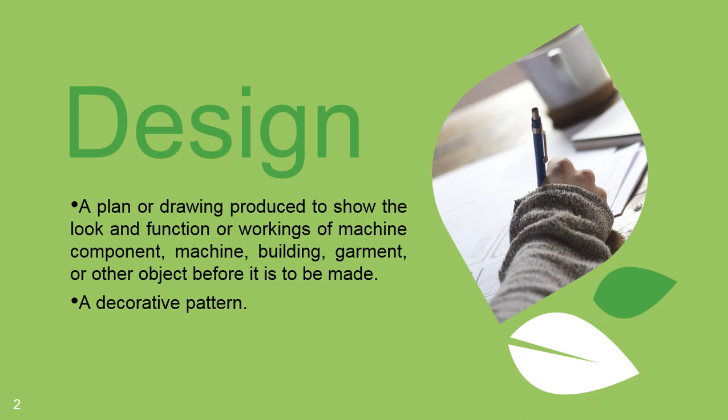So what does design provide? What things can we get from design? Number one, functionality. What does the system do? What is the process, and what else? As well as we get a message, like this diameter is that, or something.

It provides design like the traffic symbols. It's nothing but small designs which have been made. It gives a message that school is ahead, so you have to slow down your vehicle.

Professionalism, like when you are preparing a PPT or submitting your thesis, you will maintain some decorum. That's also a part of design.

Next, branding, like what we do in branding a mobile phone or any of the products.

So we use accessibility, like how it could be accessible. Like if you make a pen, can you hold it? How much time can you hold it? So this thing is relative to each other.

Now, engaging. Design is something related to marketing also, which engages you to this component or product. As well as it makes things simpler to understand, like the safety brochure given in aircraft while you board. It is written there how, in case of emergency, you have to slide down or something. That's a representation, so that's also one type of design.

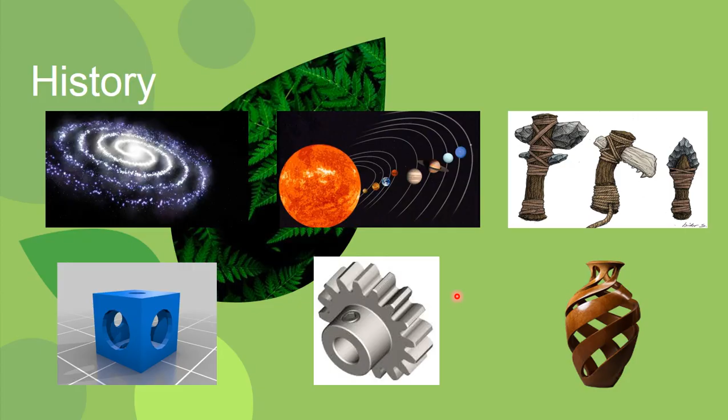Next. Now, Irene Etzkorn has stated that if you design something like a refrigerator, if the design is well enough, it will be very good. If it is not well enough, or not perfect, that means there will be a lot of problems.

Like a refrigerator, if it doesn't work, the things which you have kept to refrigerate or freeze will stink. There will be a bad smell. But if it works, it will not smell. So that's why he stated that good design is like a refrigerator: when it works, no one notices, but when it doesn't, it stinks, meaning there will be a bad smell.

So that's the thing with design also. If it's a wrong design, or if there is a flaw in the design, everyone will notice. Like in the Boeing 737 Max, everyone noticed that there was a problem with the system. So this is what happens.

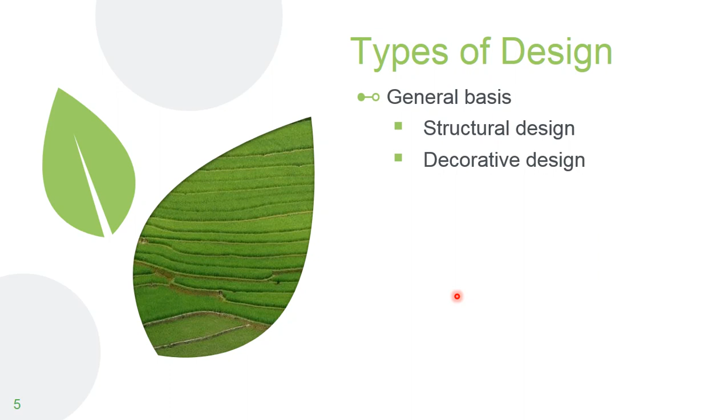Next, what are the types of design? Design has basically been divided into two categories: one is structural design, another one is decorative design.

Now in terms of origin of manufacturing, there are two types: natural and man-made. Natural is like our leaves, the earth, the planets, as well as our hills. So everything, our galaxies, everything is natural. And man-made is like mechanical, what we do when we make cars, aircraft, we make everything. So mechanical is something like that.

Electrical is like electrical networks, where we use electrical transformers. Civil is the making of homes, houses, all construction. So on it goes.

So method of design: there are two types of method we do, one is 2-dimension and one is 3-dimension. After that we do plotting: one is manual plotting, another is electronic plotting. One is done on sheet, another is done in software.

But before that, you need to know that while designing all these things, you have to go through some mathematical calculation. It's not that you started designing something out of nothing. There are a lot of things you have to go through, but it's all easy to understand if you study and explore the things.

It is somehow the same as the earlier ones, but I'll tell you what used to happen in the earlier age. So what happens is that after the 3D model has been created, it is simulated using other software, or it is simulated using pen and pencil. It has been done with both. After that, if it passes the simulation analysis, it goes for prototype testing, like a prototype is made, or something, in simple words.

A replica is made according to the 3D model presented, and if it passes, it goes for manufacturing. If not, it goes back to the 3D model, and they spot out the problems where they have failed. They rectify the 3D model and again go through simulation analysis, using a computer as well as pen and paper. Then it comes to prototyping.

This is similar to the ancient type also. In the earlier days, before simulation software like ANSYS, Abaqus, COMSOL existed, what we used to do is have a conceptual design, then draw the 3D model by hand, entirely with pen and pencil. There was no computer, nothing to do with computers.

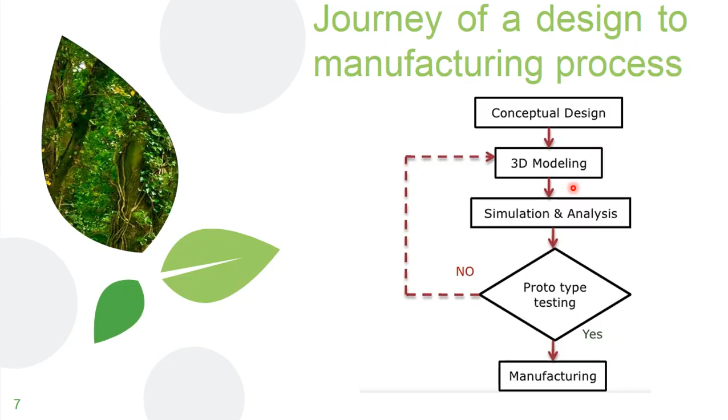Now we have software-based design concepts, which are very easy to interpret. For software-based computer designs, we have to learn one more topic in further classes, called the finite element method. That software-based system can also be linked with CNC, computer numerical control, which is automatic manufacturing. You don't need to make the physical model as was done in earlier days.

It is very easy to create, you could alter it, edit it, and it could also be used for presentation and marketing, like dummy mobile phones in a mobile phone store. That's presentation or marketing done through a 3D model. It's very, very simple.

As I told you, there's a topic about finite element methods. It's very simple, don't overcomplicate it. You don't have to learn it right now; we'll discuss it in upcoming topics.

Finite element method is nothing but analysis of a part or section in smaller divisions. That means if you have a 10mm by 10mm square, you will divide it into 4 halves, 7 halves, or millions of halves. Then you analyze each block and get the answer. This gives distributive knowledge regarding stress and strain, explaining where the actual stress occurs and how it transfers from one point of the body to another. So it gives a brief idea about the design and diagrams, everything.

This comes with a new example for today. This is where the design situation starts, termed as design synthesis. What is design synthesis? It is nothing but a manufacturing process, but from design to manufacture, there is something to be kept constant and something not to be considered constant. This is where synthesis comes in, meaning where you can change or alter things.

Let us take an example of a Coke can, Coca-Cola cans. The diameter of the can is similar for every can you buy; if you buy thousands of cans, you will find the similar diameter. That similar diameter has to be maintained to resist the pressure, so that it will not deform due to high pressure. In other words, the minimum diameter required to be maintained for every can, such that the pressure generated inside a cold drink can should not cause it to explode or deform. The body should not be deformed. So this is what is happening.

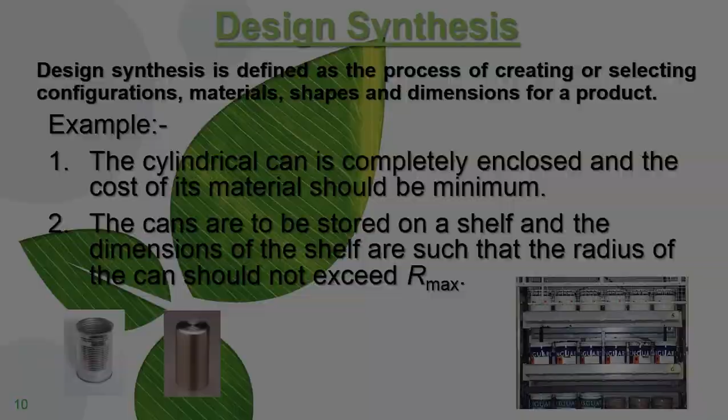That means there will be very less tolerance allowed. Like diameter is 15mm, so that will be 15, but there may be tolerance like 14.95, 14.92, or 14.2, 14.8. So they have a very less tolerance. For that you need precision in testing elements. Okay, that is where the design process is, synthesis is done.

Now let us go for a small review of how it works for the design process. For a simple example, let us consider a mobile phone. We'll understand with this example that will give a more broader view.

So what happens is that a mobile phone company will be surveying the market. After surveying, they will define their specification - they study what specification is required and what is not. After that they will search for this product - do we have that product, or do we have to have this type of product or not. If it is there, we'll be updating it. If it is not there, we'll be creating it.

That's done. After that, if it is being updated, everything will be laid out - what components are required and what are not. This will be generated and calculated over there. After that, the individual components will be designed - that means the upgradation or the new components needed, everything will be developed, and a prototype will be made.

After that, the prototype will be tested again. If it doesn't satisfy, it will go back again. They will check the components, the design, the drawing, the diagram. After that, they will come back and wait for the certification.

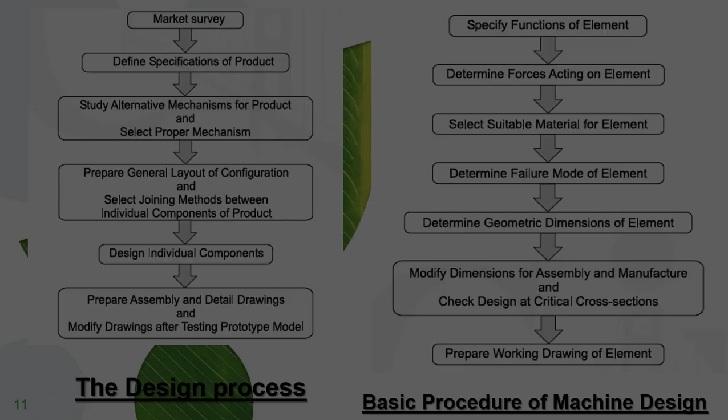In the next session we'll learn about how models and designs come into action, as well as learn about the forces - since we are in mechanical engineering, we'll discuss how many forces are there and how they work, and you will learn about new forces acting on a body which you have not studied earlier. Thank you, have a nice day.